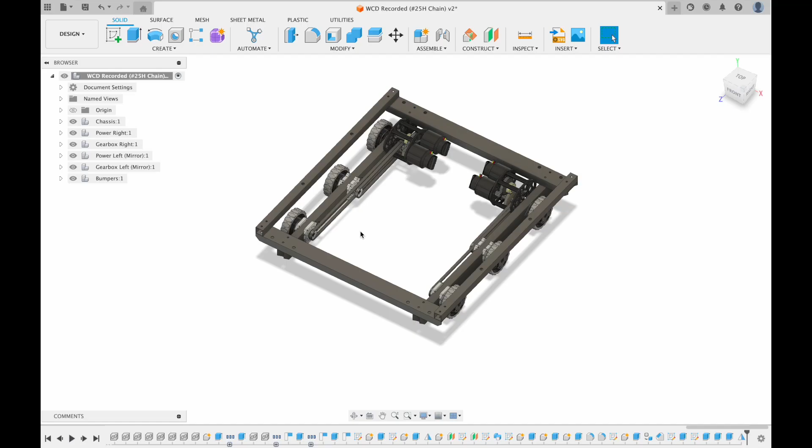Last part to all of this is to create the e-board. I'm going to create the stock that runs across here and then 2 pieces of stock that run this way, just to give the e-board a bit more support and the Drivebase in general a bit more structure.

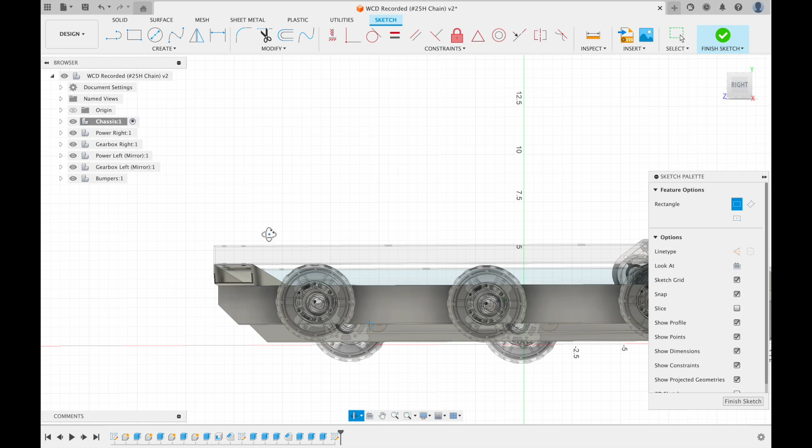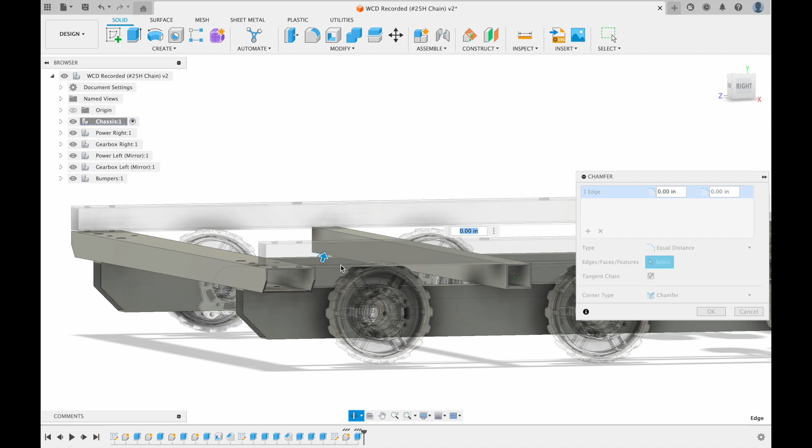I'm just going to do that under Chassis, create a sketch on this face, and then create a 1x1 square here. I'm going to chamfer the bottom edge of either side and then create another sketch with 2 holes to attach the stock together.

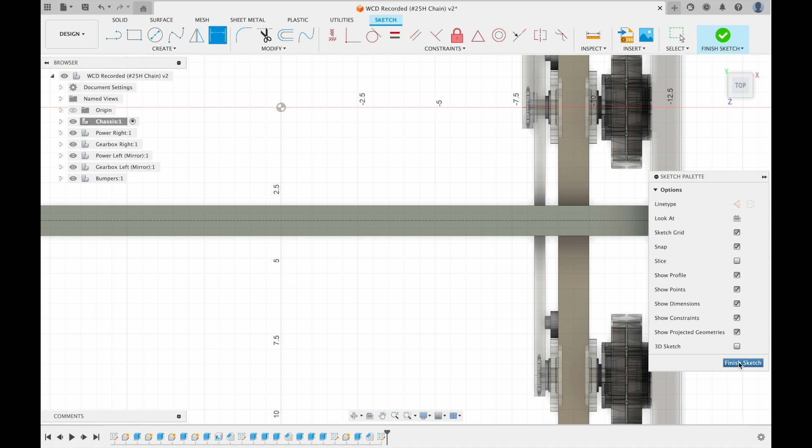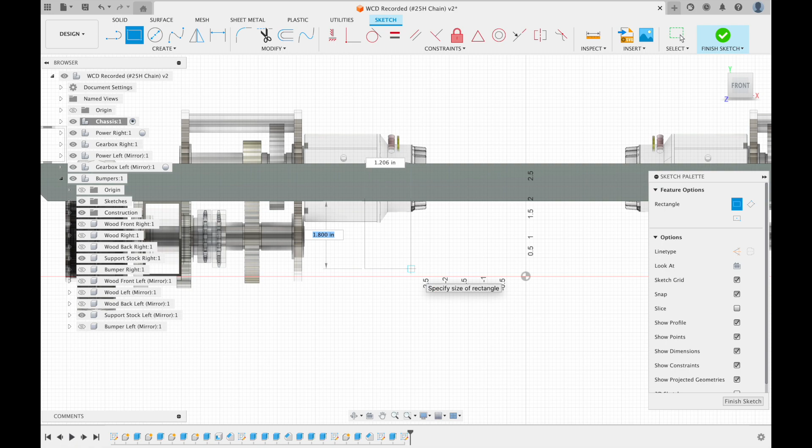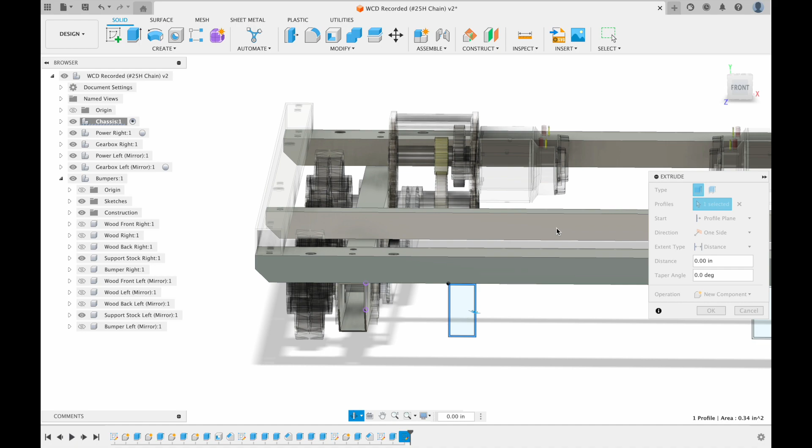Next, I'm going to create a sketch on this face, and then create 2x1 stock, and dimension it to be 3 inches away. I can then go ahead and extrude to this side, and same for the other stock. And then I can chamfer the bottom edge.

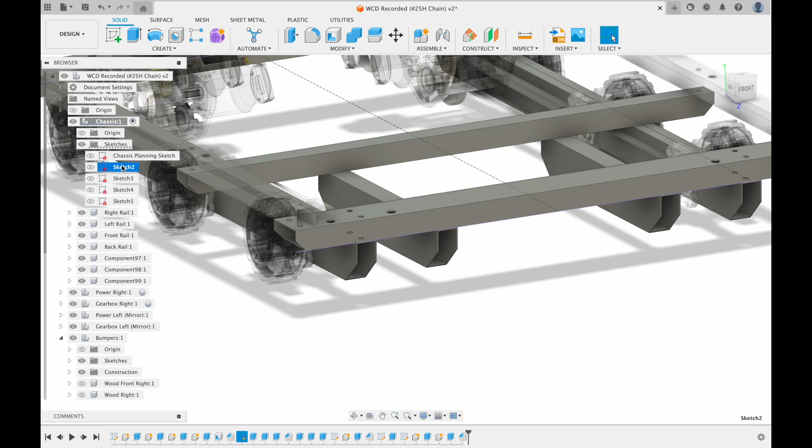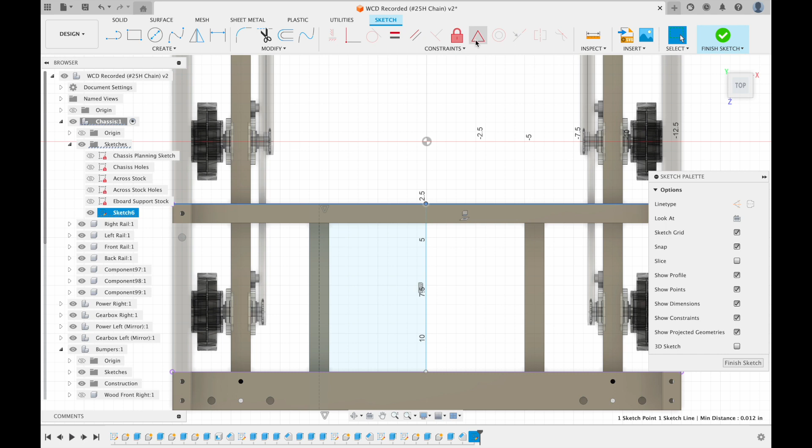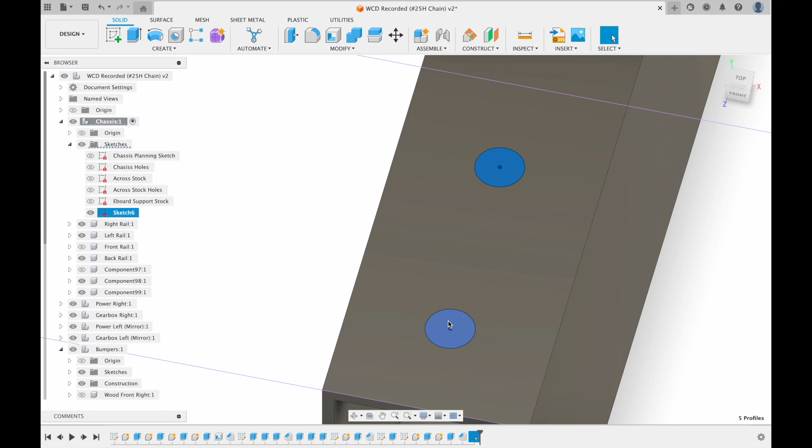And then before I do anything else, I'm going to name all of this. Next, I'm going to create another sketch on here and create mounting holes for this. So now that that's done, I'm going to name these.

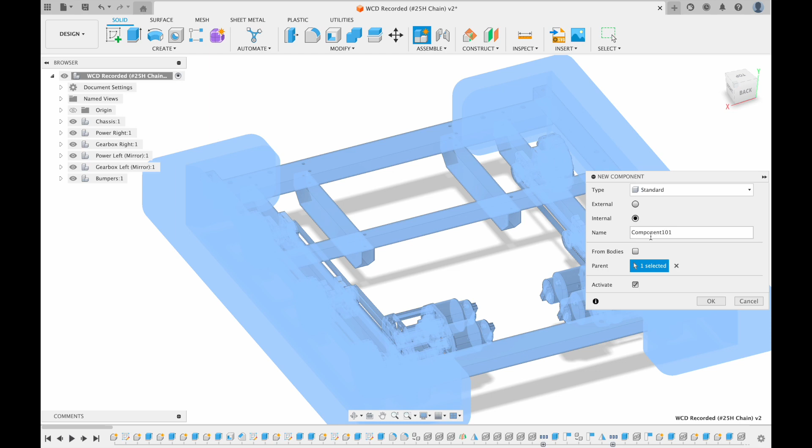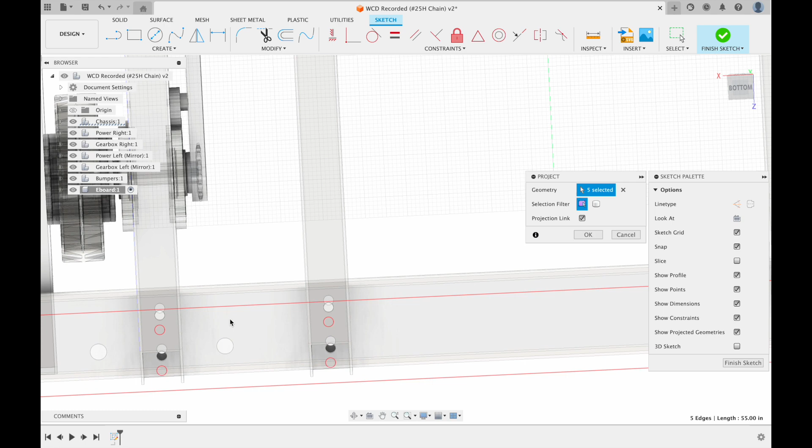And then I'm going to create a new component called e-board. And in that, I will create a sketch on the bottom plane. So I'm just going to go ahead and project a few lines. This is what we're going to constrain our plate to. And then I'm going to create a rectangle.

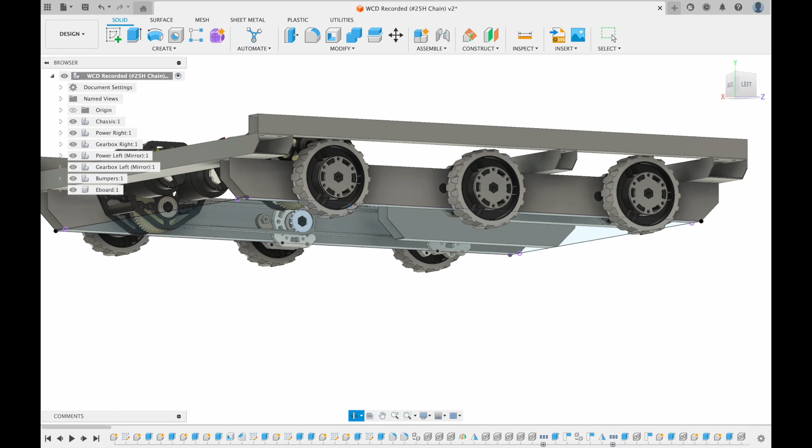Now, as you can see here, maybe if I activate everything, you can see it better. There's interference with the gearbox, the Versa blocks, both of them on either side. So in order to stop that, we need to create a few cutouts in the e-board. So I'm just going to go do that.

I'm going to start with projecting this just to make it easier to see. And then I'm going to create, let's say 4.5 by 4.5. And then

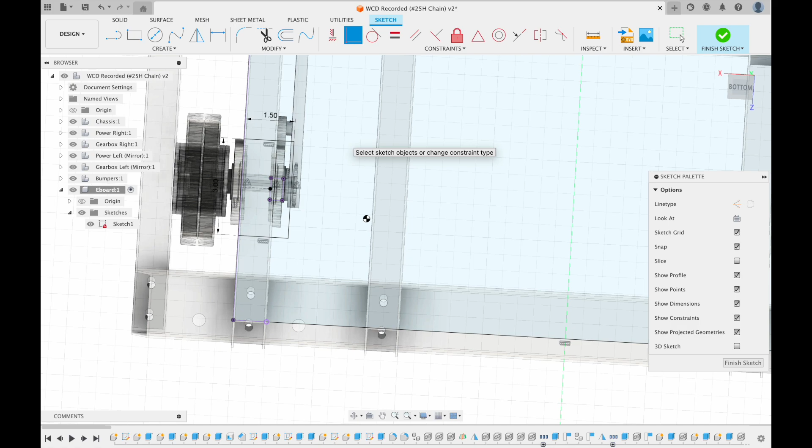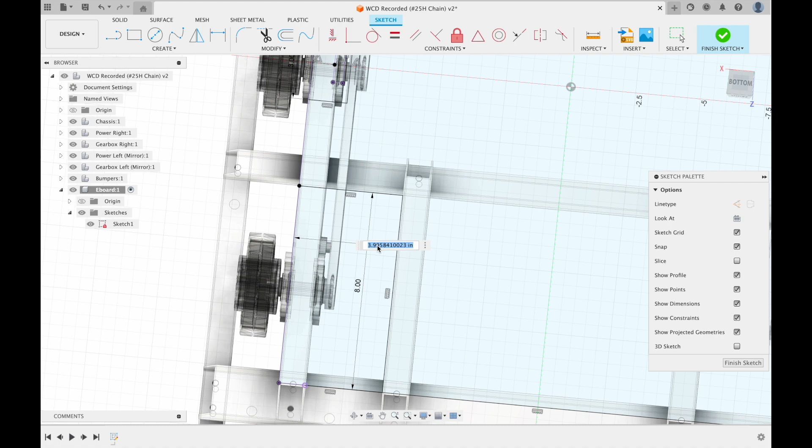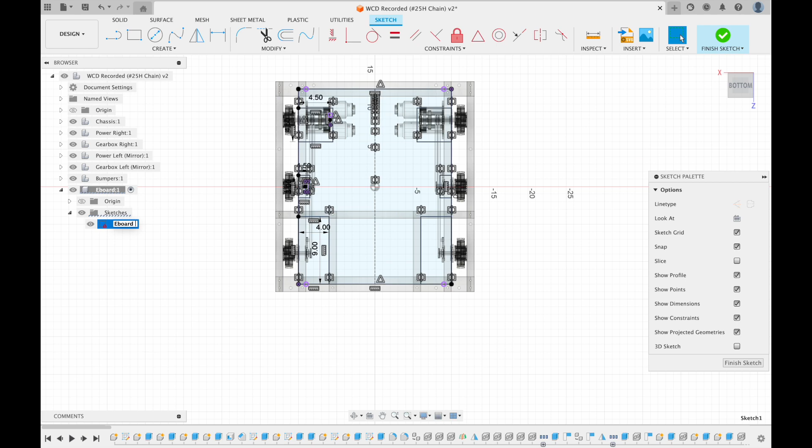Actually, I didn't even have to do it for this side because I'm just going to go and cut all of this out. Then I'm just going to create a line running down the middle here and mirror everything across this. So now that we have the plate, I'm just going to name this. And then extrude this.

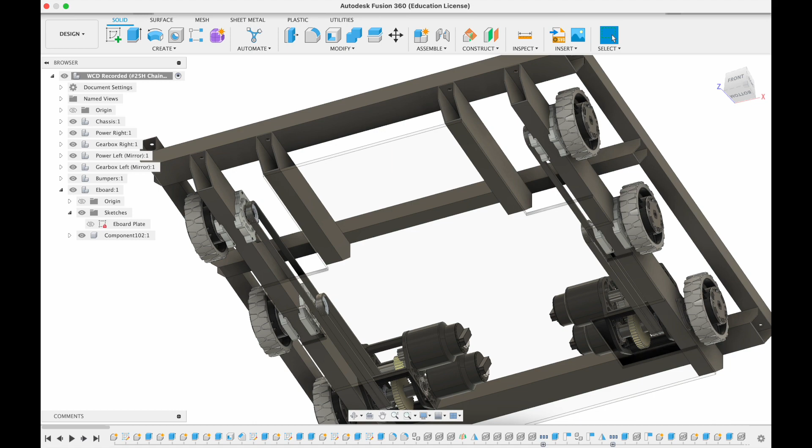And there's no longer any interference. So I'm just going to change the appearance of this. And then I'm going to go and fillet everything. So this is going to be 2 inches. And then finally, these fillets are going to be 0.25.

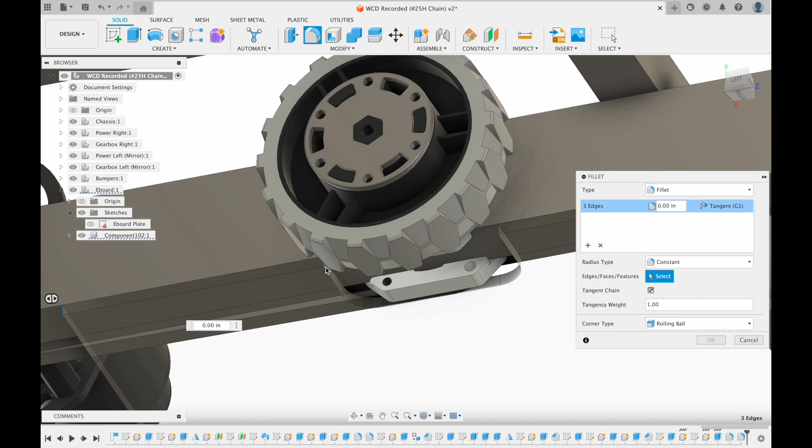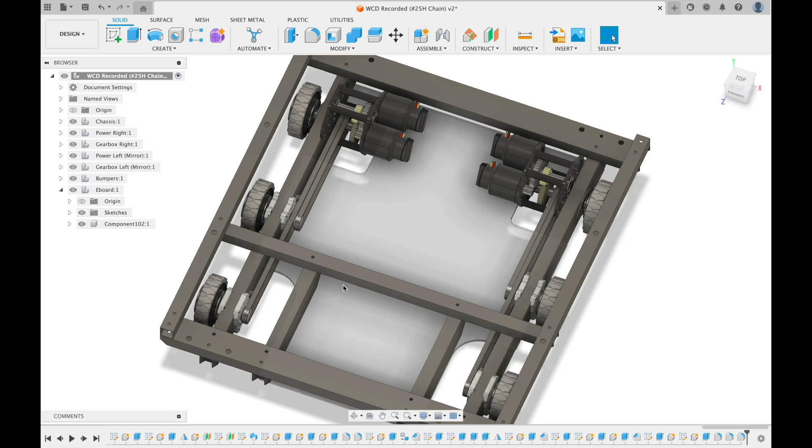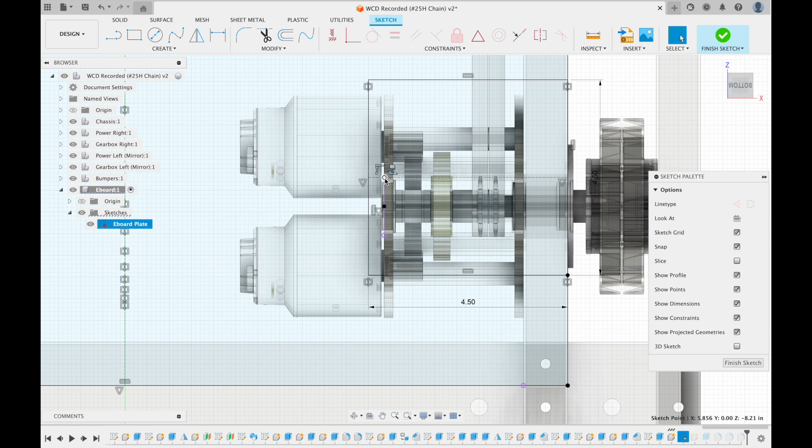So that's the e-board plate. I'm going to create mounting holes later, but first I'm going to start inputting all the electronics. Oh, that's weird, that should be in the middle. So I'm going to go back and fix that. Okay, so that's the e-board.

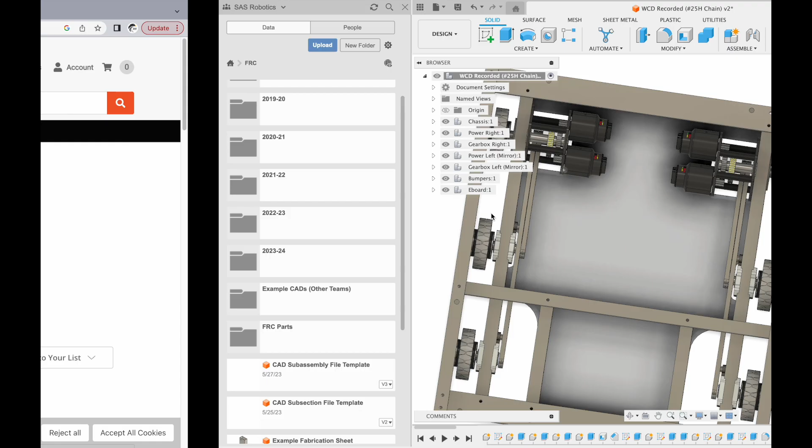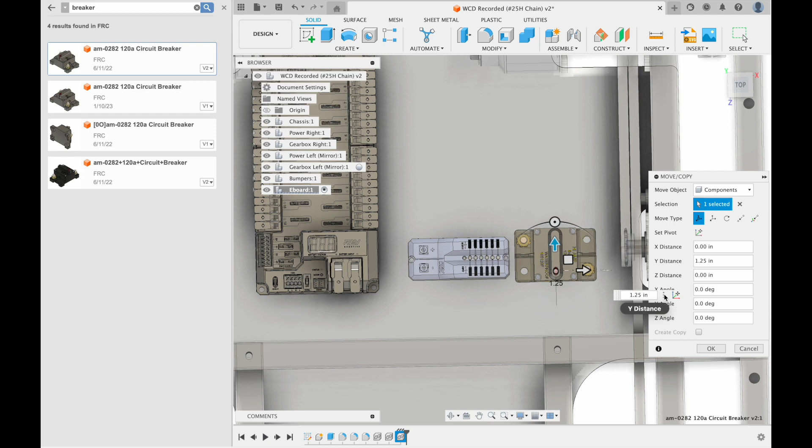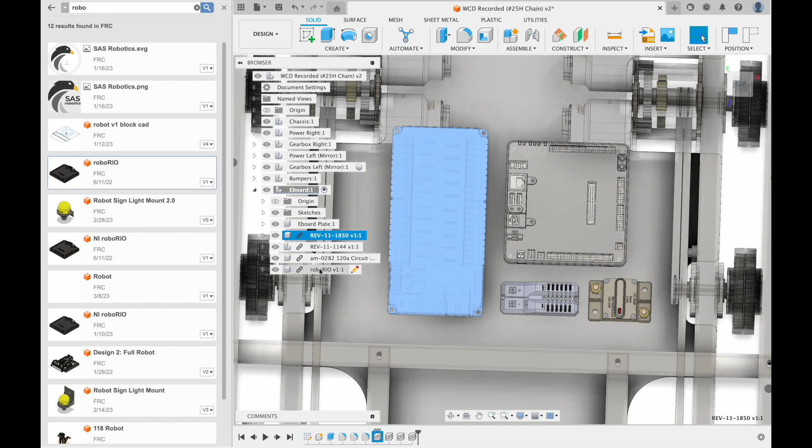And then if you want to know more about electronics, you can go to the EMP resource folder. But right now I'm just going to input the electronics. Okay, instead I'm going to go, this is the mini power module. Then I need the breaker. And then lastly, I need the radio power module.

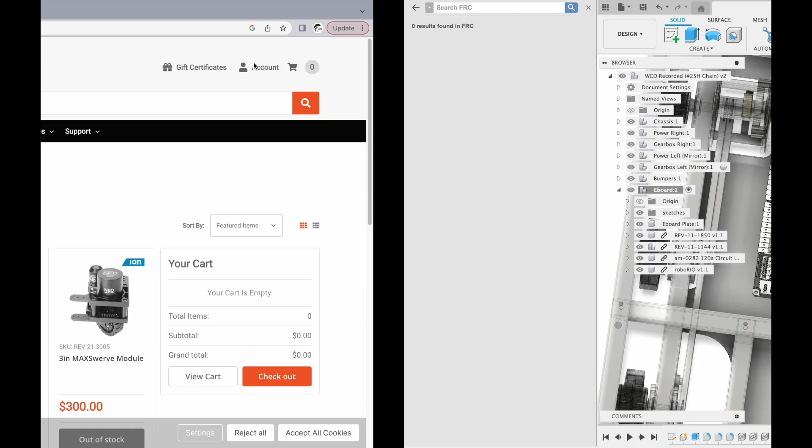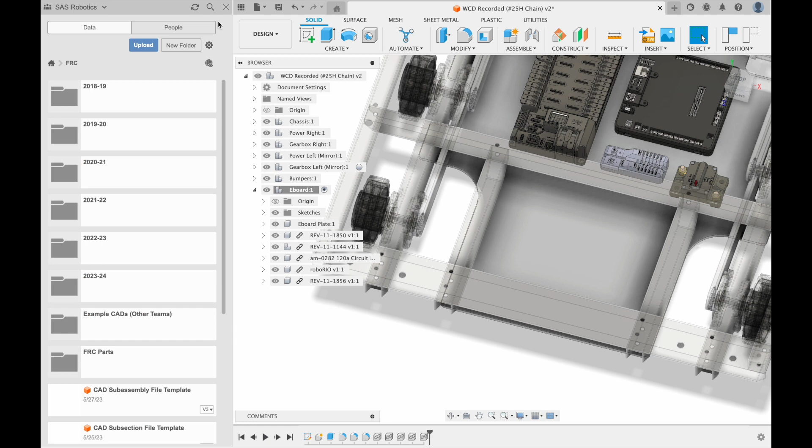So a lot of the placement of the electronics has to do with the wiring, and you just need more space for that. I'm not really going to get into that, but there is a document on the EMP resource folder that is all about how to CAD an e-board. The only thing missing from this is the battery and the battery bumpers now, so I'm just going to insert those.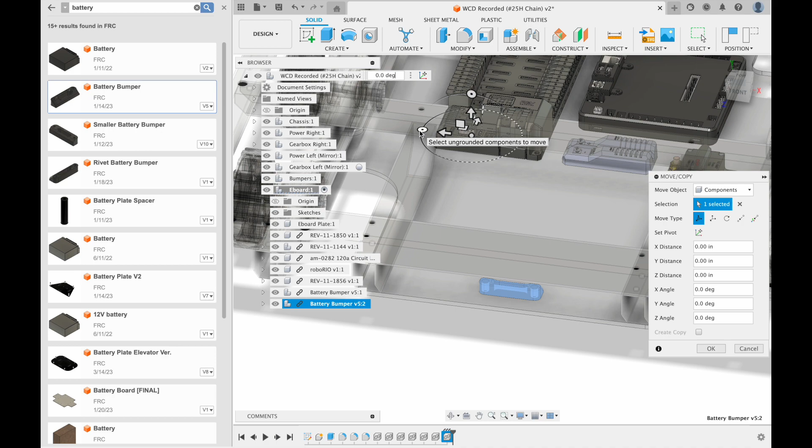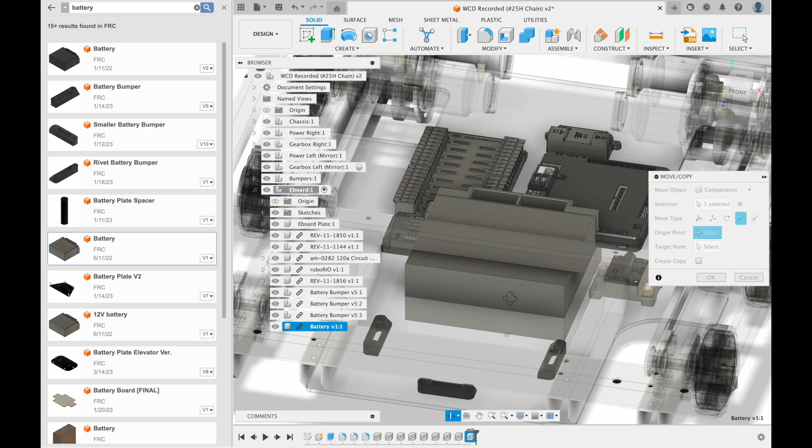Then I'm going to insert the battery. And then finally I'm going to insert the last battery bumper. If you're wondering how I got those values, all you need to do is just search the dimensions of the battery and then subtract it from the dimensions of the little pocket that we made. And then

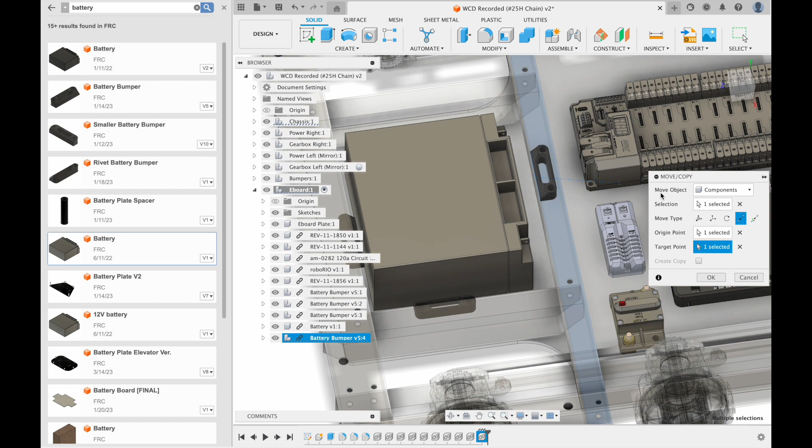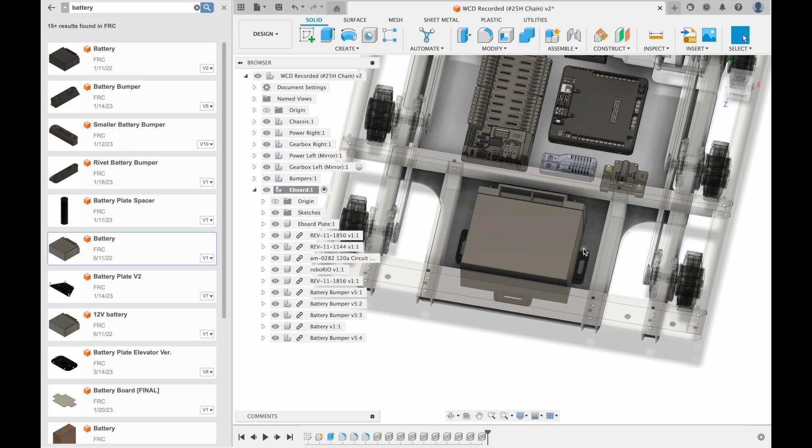Search the dimensions of the battery. Actually, I can give it to you right now. It's 6.58 by 7.1. And then the dimensions of this, you need to figure that out and then subtract it and find where an equal distance would be to put this. The reason that I left a bit more space up here is just because there's going to be wires coming out of here that you don't want to hit the stock.

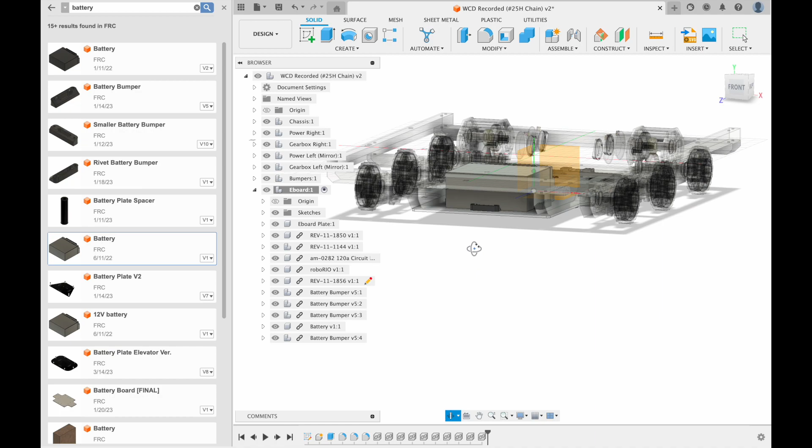And then last thing is all the mounting holes for the e-board. So I'm going to create another sketch on this face, and then I'm going to project all these holes and create a couple new ones as well. So you can actually rivet these battery bumpers down, but because this is a Delrin plate, I don't want to run the risk of cracking it.

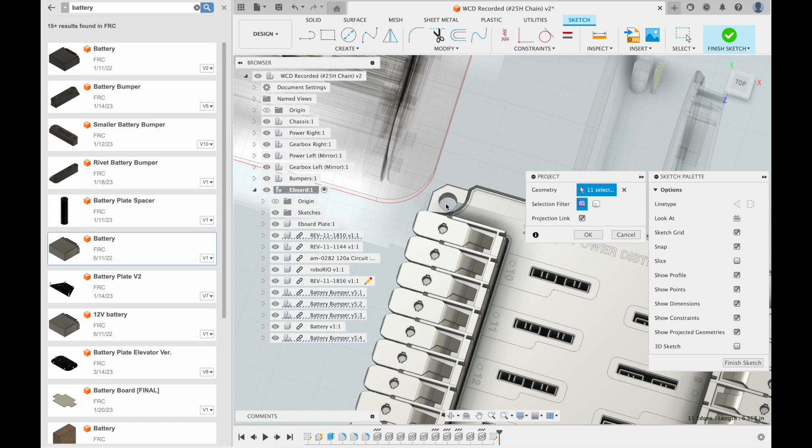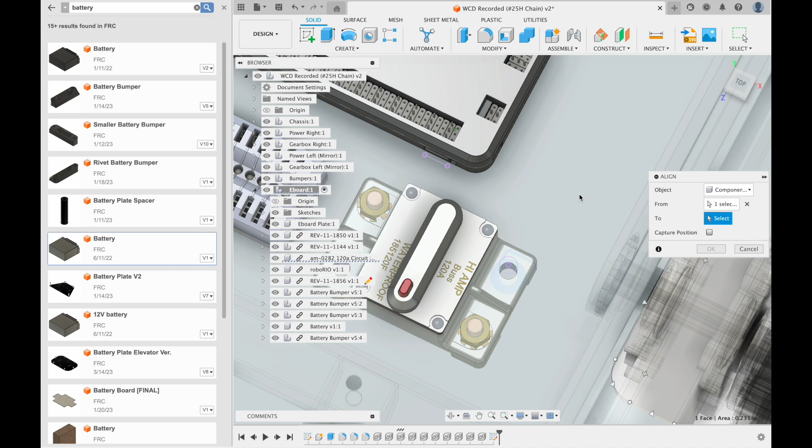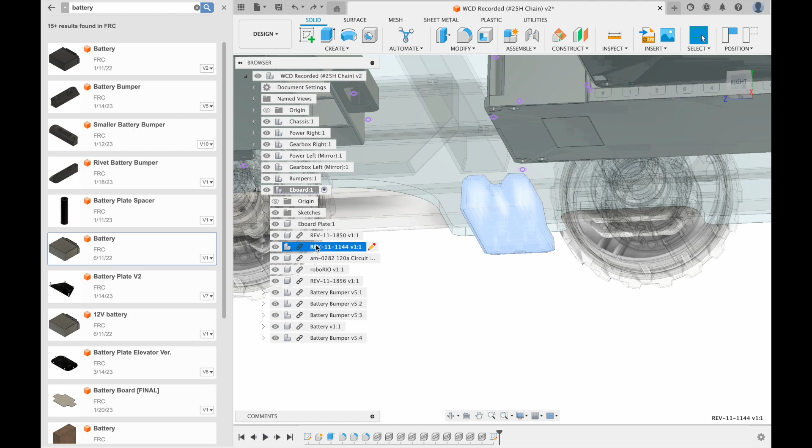Oh, and something I forgot to do is you want to make sure to just align all the electronics to the top of the e-board. Okay. So if you can't align it, if these pieces are separating, you can always point to point. Okay, and the last set of holes that I need to project are these ones.

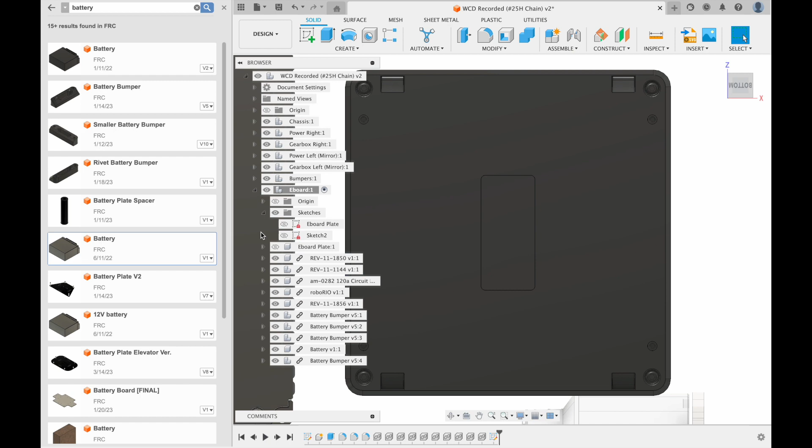Hit finish sketch, and then once I have all of these holes projected, the roboRIO is actually zip tied down, so I'm just going to create a 0.1 by 0.25.

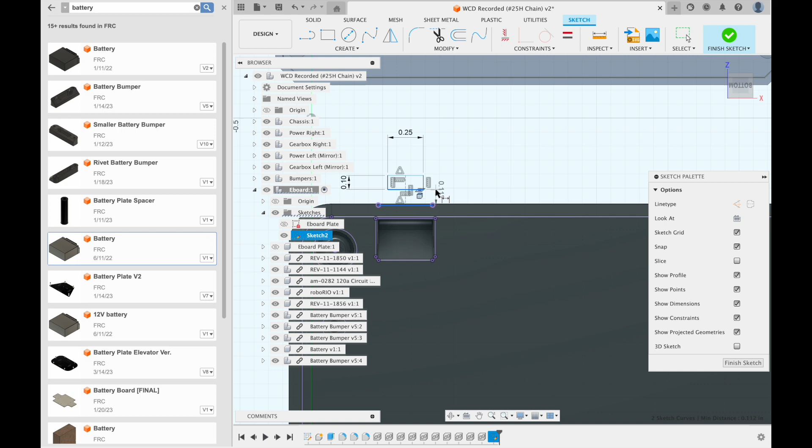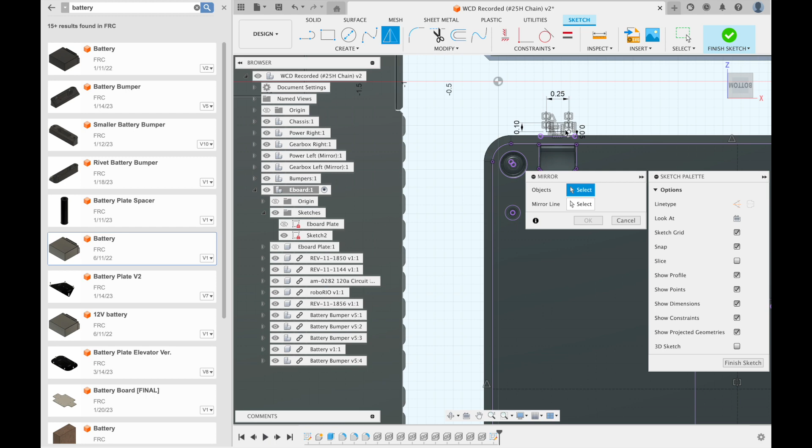And then I'm going to create these mirror lines so that I don't have to keep doing that. And instead I can just mirror this rectangle across. And then do that one more time. Now I can click finish sketch and begin extruding all these holes.

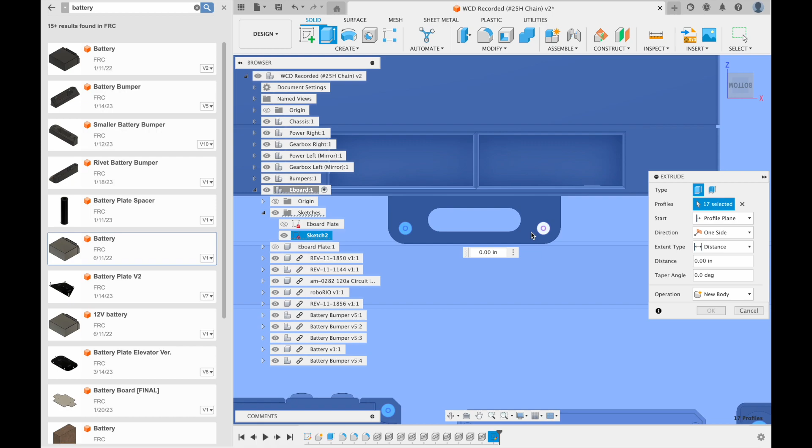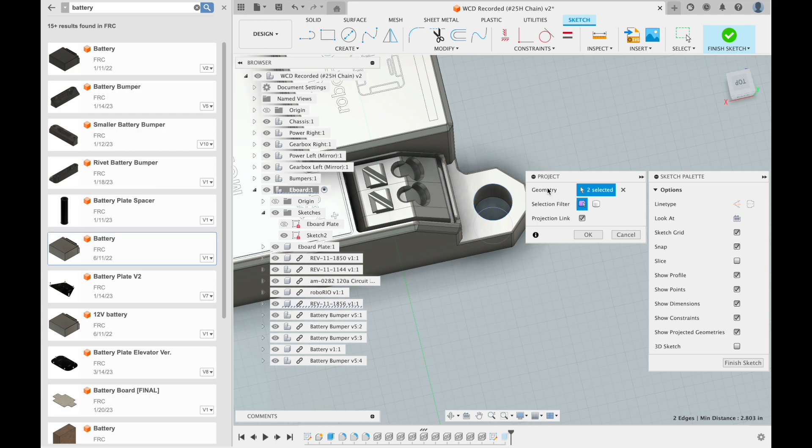So there are two more things that I have to do. First of all, I missed this hole, so I'm going to go back and project those. And then also, I need to create Velcro holes to hold down the battery. Over here. So to do that, I'm going to make a center-to-center slot.

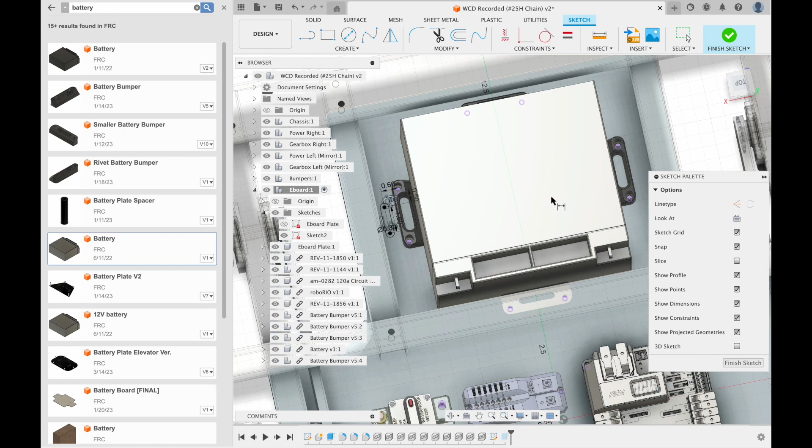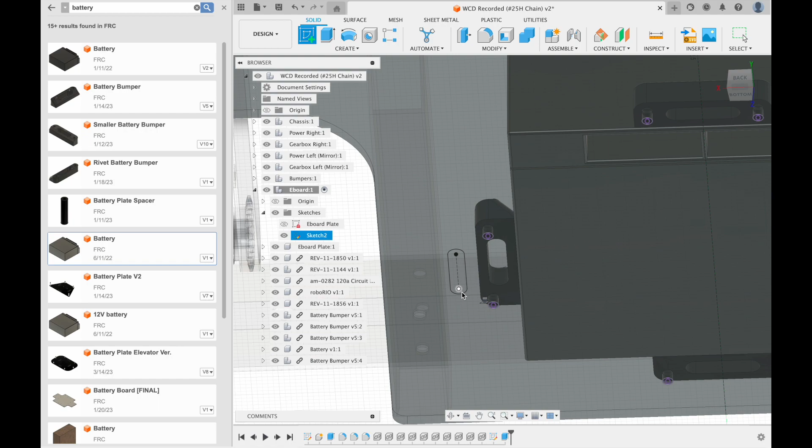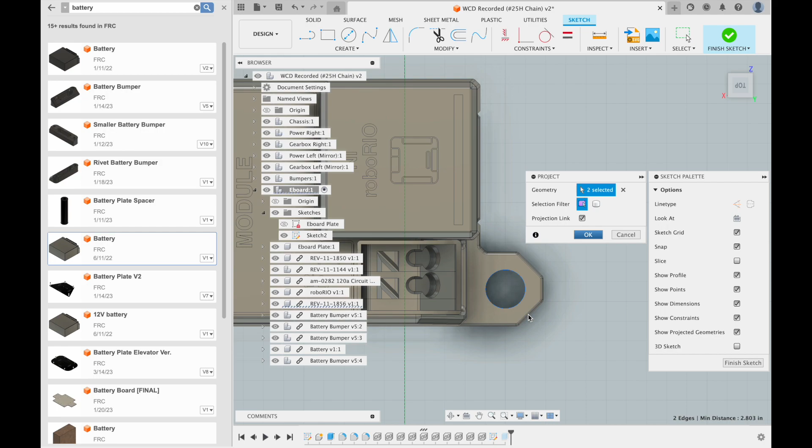And then mirror this across this line. Hit OK, and then I'm just going to extrude those two things that I added in their own extrusion. For some reason, it never projected, so I'm just going to go ahead and project that again. And then I'm going to extrude that.

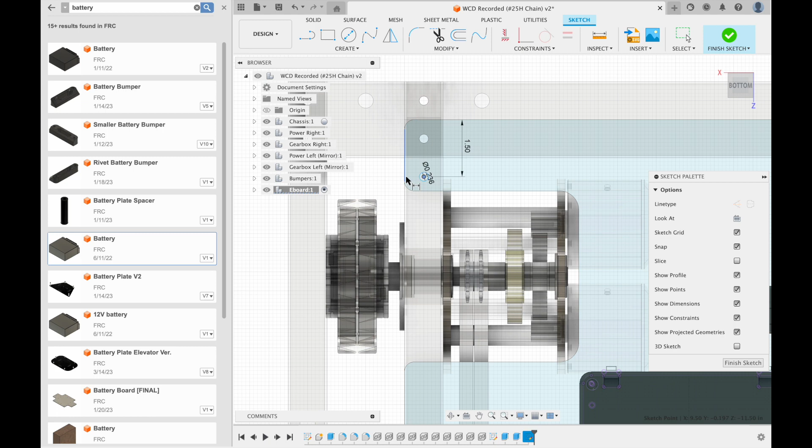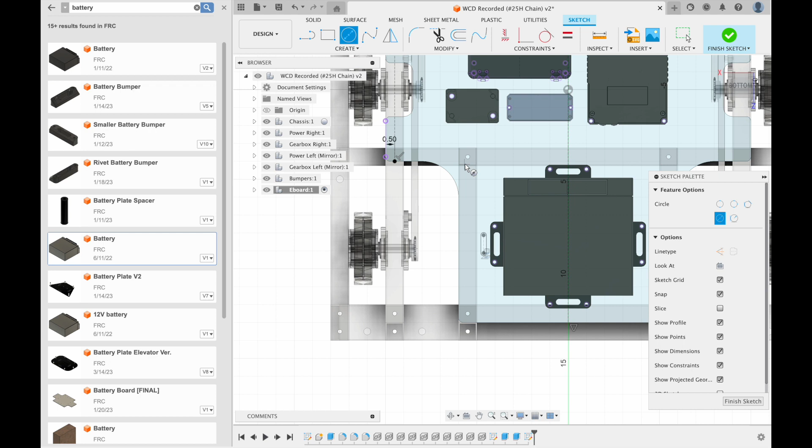And that's how you make the e-board. All that's left now is the mounting holes. So I'm going to create one last sketch on here. I'd probably go with two holes here. But first, let me just create a line going down here. And then I'm going to mirror these holes. So I'm going to make 3 holes going down here.

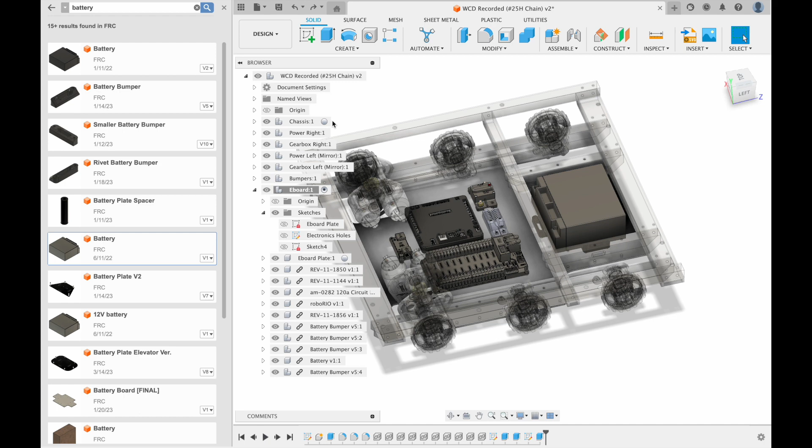And that's the mounting of the e-board. So I'm just going to show everything now. And that's pretty much everything that you need for a West Coast Drivebase. This is the last video on how to actually CAD the West Coast Drivebase.

As usual, please refer to the slide deck for any more information, and please complete the quiz after this slide and the slide deck that covers everything that I talked about in the past few videos.